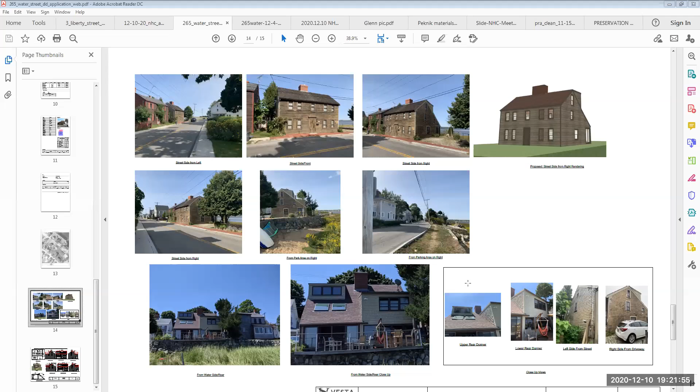So while we can potentially be exempt from certain building code items such as ceiling height, which actually we will already need because we're only going to have about 6-foot ceilings, which is under the 7-foot code requirement, we don't have any exemptions from the structural requirements. So when we add this dormer on, we have to meet the structural requirements of the code.

Okay, and while I'm going to ask the commission if they have any questions, in the meantime, if there are people among the attendees, members of the public who would like to speak, we can start queuing you up—raise your hand, and we'll briefly get to that point. But first, let me turn to my collaborators here on the commission. Does anyone have a question for the applicant?

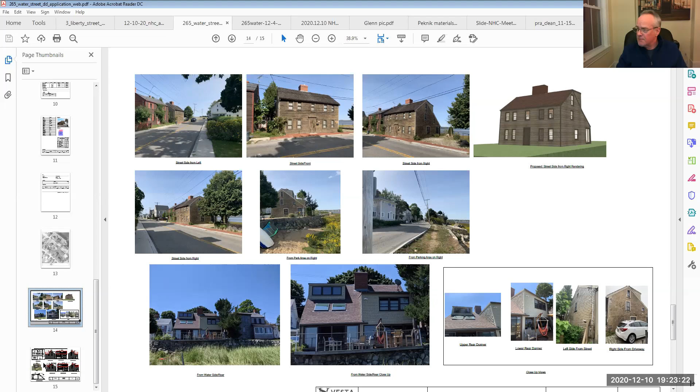Yeah, Mr. Chair, I have a question if I could—it's Peter McNamee. Go ahead, Peter. I understand the design intent around gaining those crucial extra inches up above. Certainly 5'3" or whatever it was is insufficient, so that I understand. I do sort of lament the fact that that dormer has that dead flat, or effectively dead flat, aspect to it, as opposed to the older dormer, which does at least continue looking like a sloped roof a bit. But again, I understand the head height issues. Why is it that the dormer has to run right up to the extreme edge of the building on either side, as opposed to being inset, just to break that surface up and maintain the salt box aspect?

I can speak to that. So in order to raise this beam—if we look back at that on the A2 sheet on the bottom, this section—the ridge beam itself is no longer centered underneath the ridge as in a typical building. And so we're actually taking advantage of the flatness of the roof so that we can keep the beam up even higher than we might otherwise be able to. I would prefer to see the dormer off the side walls as well, and Walter was open to that option. It's just a kind of structural conundrum—I have this beam that's very wide, and I was able to sort of disguise it in the very low slope roof. As soon as we need to fit it under that tight triangle of the roof, it has to drop back down, and we're back to that very low ceiling challenge.

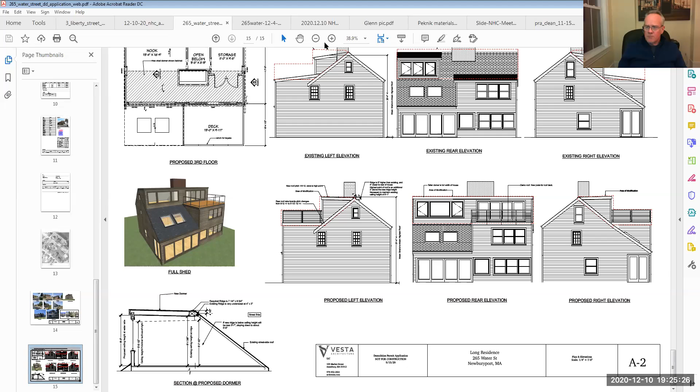Yes, I think I followed what the architect is saying. The beam itself, if we were to end it short, it still needs support all the way to the foundation, given this shaped beam. So I need posts somewhere, but there's no place to put posts. It's a very small house, and I can't disguise this massive beam without the aid of that sort of flat piece of roof.

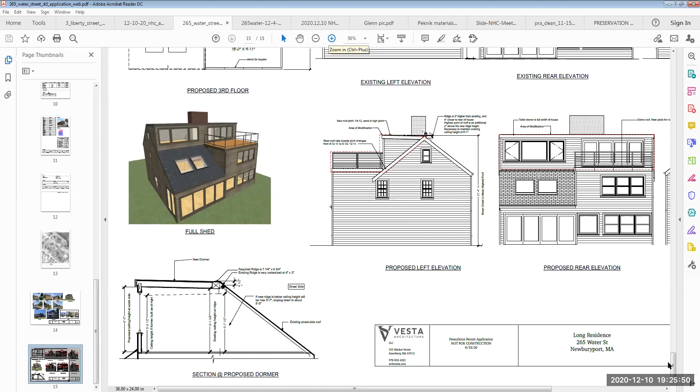I wish I could zoom in on this section so you could see the edge of it - the beam in the center, that X in the middle of the roof where it switches from a steeper pitch to a flatter pitch. The right-hand side of that beam is actually at what looks like the ridge center, the old ridge, instead of where you might more typically have that beam centered underneath the ridge. So it's just a problem of support and structure, and there's no way for me to disguise that beam.

Did you take this problem to a structural engineer to see if there was any way at all? It's pretty blatant, being right up hard against the end of the house. This was designed by John O'Connell - actually, I didn't design the structure. And we had various other conversations about things like potentially using a piece of steel.

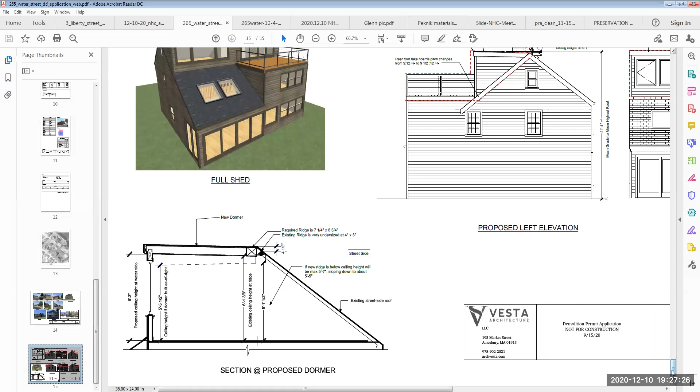Even with steel, we weren't going to get a section that was any shallower than 7 inches, and even if it was narrower, we were never going to get close to that 4-inch by 3-inch existing ridge. The other challenge is it almost doesn't matter if we can get a smaller section, because the roof rafters have to be at least 2 by 8s. It's not like in 1710 when some of these pieces were like 1 1/4 inch by 1 1/4 inch. There's no material with that structural capability, and we also have to insulate, and there's no insulation that thin.

All right, visually I find that disturbing. I don't know what my fellow commissioners think of it. I'm sure we'll come back to that in the deliberation after public comment, Peter.

Excuse me, any other questions from the commission? I do see a hand raised in the attendees, so we'll go to public comment. But let me first check with the other commissioners if you have any questions. Yes, Chair Richards, this is Joe, I have a question.

I have a question for the architect - how do you get to this space? Is there a stair inside? I know your plans aren't complete, but I'm just curious. Yes, there's an existing, very 1710 style, tight little staircase up to this floor.

Is that in the open below space? Can we scroll over? I can't remember how I labeled it. Can you scroll to the left there, Caitlin? Yes, there's an existing staircase in that space where it says open to below.

Wow, that's like a ship's ladder probably, huh? Yeah, it's all different shaped winders and very, very small. So once you get to the attic, you're not really surprised by a 6-foot ceiling? No, you're definitely not. In fact, I think the ceilings on the second floor are something like 6'6" or so - they're very low.

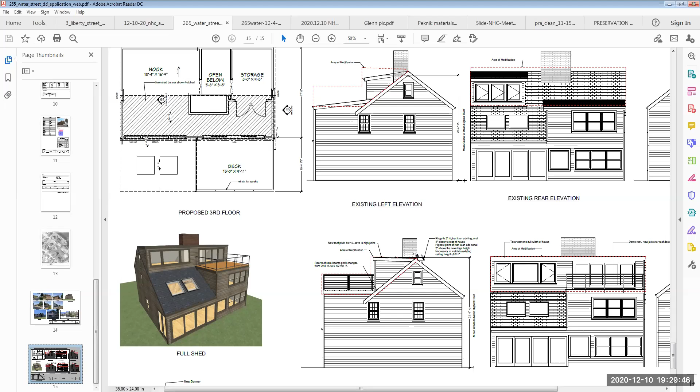Is that about what it looks like, Ms. Harris? Something like that? And actually the side on the left, the nook, is the space that the stairs actually lead to, and the side where it says storage is just sort of an open doorway - the stairs don't lead up. You're kind of at about waist height and can sort of climb in there, but the stairs don't lead into that space. Very good, that's very efficient. Thank you very much.

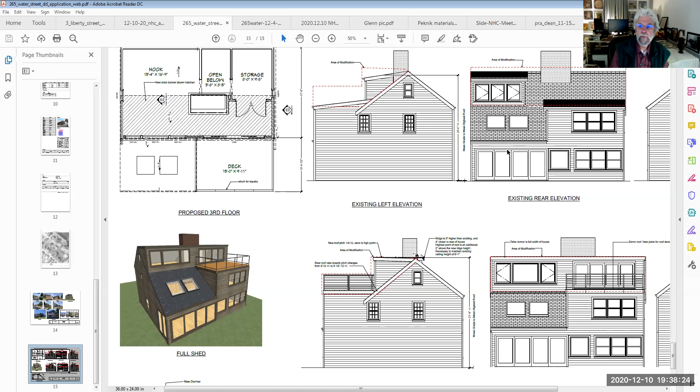Excuse me, a little hoarse tonight. Does anyone have any comments from among my peers here on what's been proposed?

Should we speak up or shall we wait for you to? No, I always like to give you all the floor first.

Okay, I have things to say, and I do appreciate Mr. Long asking specifically about what we would object to or what might be acceptable. So I'll explain that in determining when proposed roofline alterations are appropriate, we on this commission have to consult the Secretary of the Interior Standards. That's in section 5308, review procedures of the city's demolition delay ordinance.

And that states, quote, if the property is located within the Newburyport National Register Historic District, the commission will reference the most recent copy of the Secretary of the Interior Standards. So when I look at this plan, I look at that section and I read that the standards recommend against, quote, substantially changing roofs, which are important in defining the overall character of the building.

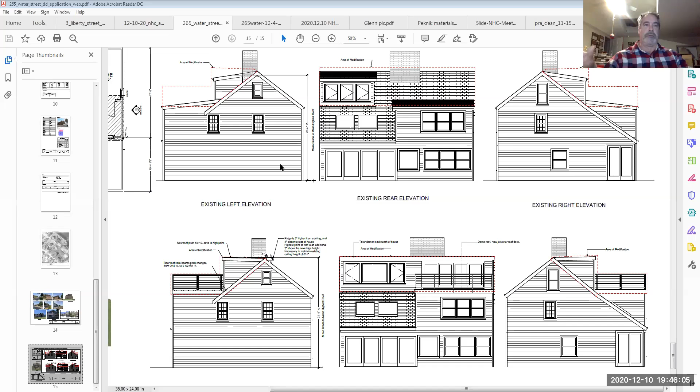Sure. So we live in an old house, as many of us do. And when we bought the house, there was carpeting up the stairs and down the hall to the second floor, and carpeting up here where I am. So we finally decided the carpeting's old, probably circa 1980. We ripped it up this summer. And what we found underneath on the stairs was a wooden staircase, oak, old. When we pulled up the carpeting in a short, narrow hallway on our second floor, we found a painted floor, but the carpet had been down for probably 35 years or so.

And so we've tried our best to get rid of the carpet and redo the floors as best we could. And it made me think about all these different houses that we look at and the discussions we've had in terms of livability and convenience versus historic preservation and protection. So at one point, wall-to-wall carpeting was livable, it was convenient, and it was fashionable, but not in a house that I live in. But somebody put it down anyways. So it made me just sort of ponder this idea that we make these decisions - and I've said this before - in a moment in time that maybe affects us, but we also, in Newburyport and other places like Rockport and throughout New England...

Maybe, you know, when the carpet was put down, the city was probably still in a little bit of a rough shape, right? But we've come to this recognition that the image I'm looking at right now on my computer, of the current back of the house with a deck and a dormer and an extension and sliding glass doors - I mean, it's got everything. This thing has everything in the back that somebody decided was a good idea.

I don't know if the current owners did it. I don't know if the previous owners did it, but it doesn't do any justice to the house. And I don't think that just moving the deck from the first floor up to the second floor, or the third floor I guess, is going to do it any better. You know, it's a shame that this was done to this house whenever it was done the first time.

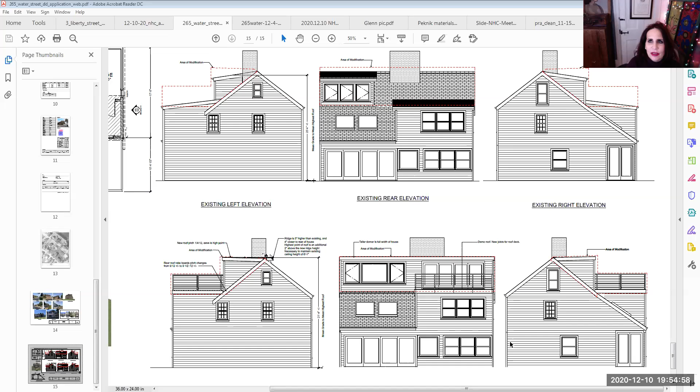Chair Richards, I can't see if there's an attendee with their hand raised. If you want to look and see who it is—I don't know if it's Mr. Long or something, looks like Stephanie Nekatish, but the public comment period has ended. We've had the motion and voted on it. I wasn't sure if it was the owner or somebody else. I don't see the same thing you guys are seeing. And it looks like she's taken her hand down.

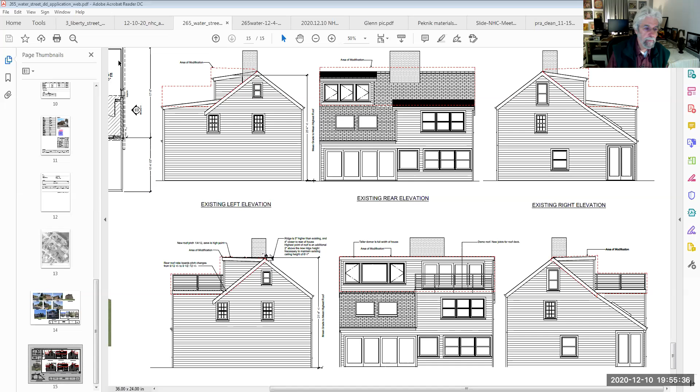Okay, let's move to the next item, which is 3 Hancock Street, and this should sound familiar to most of you.

For the benefit of the applicant, at the last meeting this was held, Vice Chair Peknik wasn't able to attend, but she has gone through the video replay so she could participate in the discussion. Chair Richards, yes, I did contact Diane to get the form to sign. She's out till the 14th. So yeah, I understand, I can't sign that, so I don't know if I can participate. Well okay, I did listen to the recording, but yeah.

Okay, so anyway, this is just a very brief recap. This has been before us twice before. This is the house, a very small house with a bit of an unusual roof line, and they're basically looking to raise the roof in the rear section, and they've gone through a couple of iterations.

Will either Ms. Mead or Ms. Bowker be speaking on behalf of MTC, or the architect Scott Brown? Yes, this is Olympia Bowker from MTC. I'm here on behalf of the applicant, and with me is Scott Brown, who will be able to delve into the nuances of the plans.

Okay, who wants to start? I suppose I will start. Let's see, can you hop to the next slide, please?

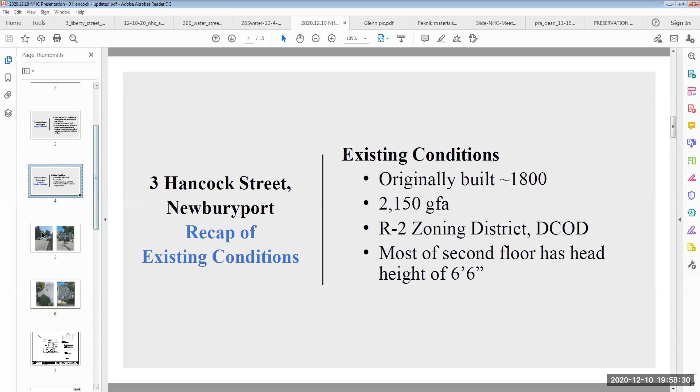Next, yep, and here are existing conditions. We have an 1800 house, relatively small, approximately 2150 gross square feet, and short ceilings. Next, and here are photos of the existing conditions to refresh your recollection.

Side views, and here is the site plan. And now I will pass it over to Scott to explain the drawings.

Good evening everybody, Scott Brown, the architect for the project. Good to be with you all again this evening. In the days immediately following our last meeting, I was pretty eager to get back out to the house and do some exploratory demolition. So Caitlin, if you could please go to the last slide in our presentation here.

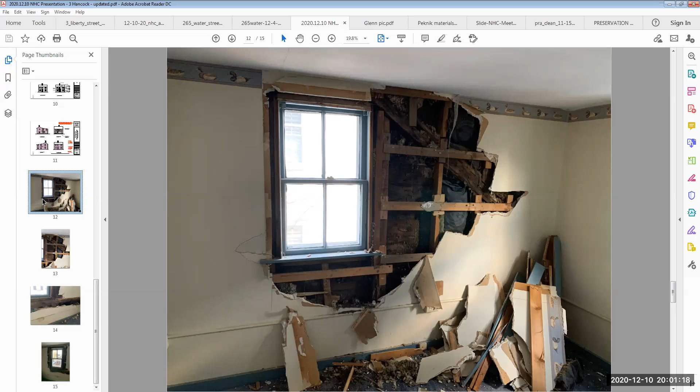So this is the gable end, and what you can see there on the diagonal is the main rafter of the timber frame. And if we go to the next slide, number 13, you can actually see the notches where the roof purlins used to be.

So this was a side window, correct? Yeah, side window, right side of the house, gable end. So this was originally a 1.5 story house. It was never a 2-story house. And I found that very interesting.

So in this room, I didn't find any original window openings. This is actually quite disturbing too, because from a structural standpoint, what they did when they proposed to pop the top of this house was a very bad thing, because these entire exterior walls are essentially a hinge, and there's really nothing holding them together. So as we move forward, that's going to be a challenge for us to deal with in a structurally sound way.

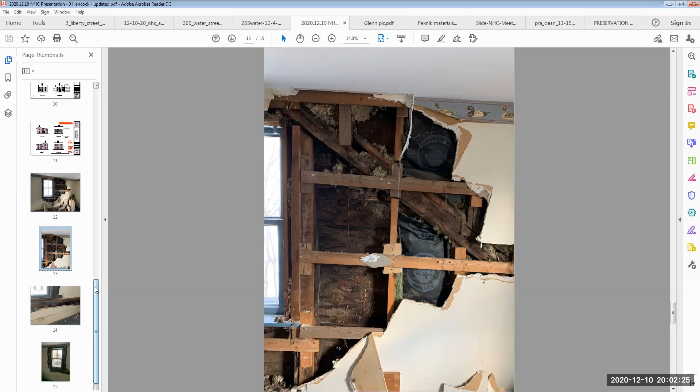Caitlin, if you could go to sheet 10 of 15, which is our A2.2, which shows... so this is a sheet, the next one. Yeah, this, okay, all right, right here.

And can we go to the other sheet, Caitlin, A2.1? So this is all 4 of our proposed elevations.

You can see on both the right side and left side, I have some red dotted areas, which indicate the existing window openings as they are today. Those are the only window openings that we're actually proposing to change.

So on the left side, you see 2 at the second floor at the left rear, where we're taking those existing window openings and lifting them up to coincide with our new floor heights. Doing the same thing on the right side of the house, 2 window openings second floor, moving them up, and 1 window opening that we're infilling. On the rear of the house, we're making so many changes that I didn't bother putting in those red lines, because it would make a mess of the drawing.

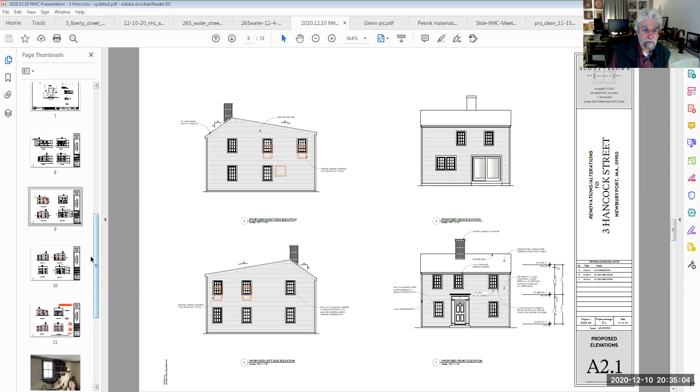Okay, so part of what you're supposed to submit is, quote, a demolition plan. This is technically called a demolition plan review. So do you have architectural drawings such as the ones on the screen right now? Right now the only thing in red I'm seeing is some window positions changing. I'm not seeing any... Our DCOD calculation sheet clearly outlines the areas that we are removing.

Okay, so the ones that have the diagonal hatching are unchanged and the cross hatching is changed? Correct. Okay, so just so we're all clear on this, all the areas that simply have the diagonal hatching would not be affected. So it looks like we're affecting - and I can see with the window placement - starting from the upper left, moving clockwise, we've got some window placements and a window that's being filled in.

On the rear elevation, some fairly extensive changes there, where I think in the lower right you're putting in some sliding doors - I'm not sure what that was, I forget. Lower left, just some fairly small changes to the window openings. And on the front, small changes to the window openings at the first floor. Looks like the first floor windows, the openings are slightly different, making them 4 inches larger. Okay, so is everybody clear on that?

And so, Mr. Morgan, how are you reassured at all, or do you still harbor reservations about releasing this for demo permit?

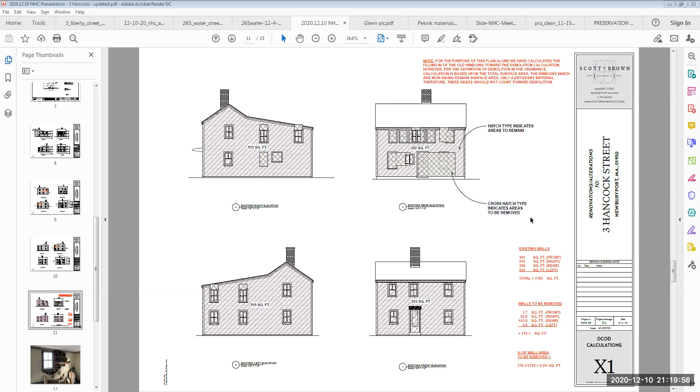My own suggestion would be the zoning administrator. I've only been here for 10 years, but there's been history about questions regarding how building commissioners handle these type of issues under zoning or historic preservation versus the building code. And Jennifer is also within the Office of Planning and Development. So it would seem to make more sense to ask her to provide that confirmation to the commission that she'll keep those periodic visits to the site, rather than the building commissioner, especially since there's a turnover happening there right now.

Yeah, I want to go with what's going to work most effectively. All right, so while you were speaking I made a slight modification to that motion, which I'll now repeat and see if...

Glenn, can I ask a question? Yeah. Is Andy clear on the fact that what you guys are looking for is assurance that the structure can withstand the work, right? So you were deciding between an independent structural engineer's report or having somebody from the city monitor the work. Is that so? From the zoning administration, you would be getting the same thing you would be getting from a structural engineer's report. Is that what's happening?

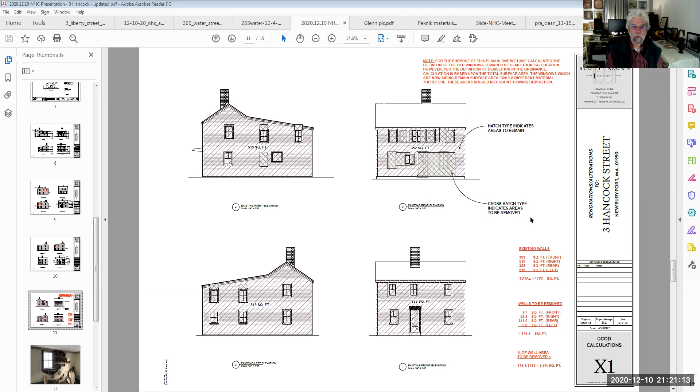To the very last thing you said, I don't think those are quite the same thing. I don't either. Okay, what we would be getting from the zoning enforcement administrator would be the assurance that we're not, to use that phrase I've used now for the third time, the runaway train effect, where demolition starts and then things are discovered and it kind of just snowballs out of control and you end up with nothing left. That's the situation we're trying to avoid.

Which I'm sure Andy understands as well, and I'm sure Jennifer will understand as well. We all understand because, for better or worse for Mr. Bork, everyone's got the Harrison Street example still fresh in our mind. So that's what it is. I personally feel that the planning office staff, specifically Jennifer, is capable of being our eyes and ears to ensure that things don't get out of control.

So I'm okay with that, without having the engineering report, but we can.

So that's the motion. Let me restate it: that the demo delay would be released if and only if there's written assurance from either the acting building commissioner or the zoning enforcement officer. Is her title zoning administrator or zoning enforcement officer, Andy? Zoning administrator, she does do the enforcement as part of her duties. Okay, that she can and will monitor construction consistent with that role to avoid excessive demolition, as at Harrison Street.

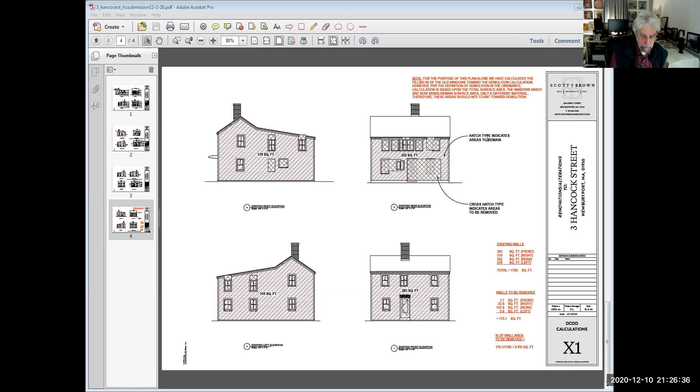Okay, and hopefully I will, and this is addressed to the applicant and their attorney, that in the meantime this board will also do a little more digging to try to make sure we have all our ducks in a row as far as how far our jurisdiction extends and how best to expedite these things going forward.